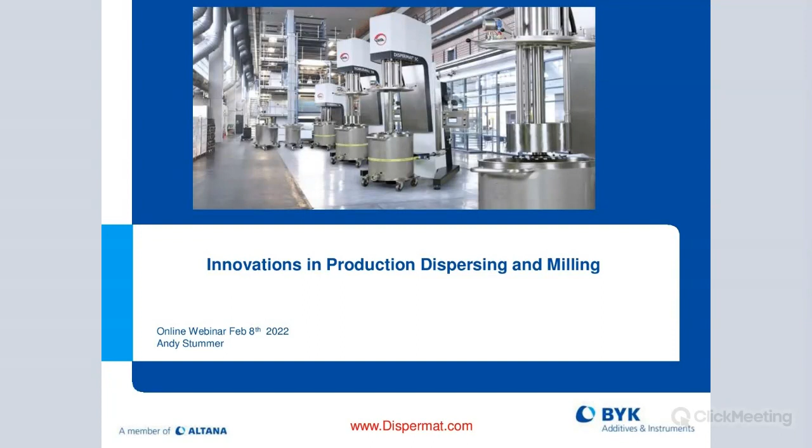Thank you, John. Welcome everybody to today's seminar on innovations in production, dispersing, and milling. We're going to discuss a little bit of theory, and then we're going to dive right into the different types of equipment, and also give you a little bit of an overview of who VMA is and the relationship with BYK.

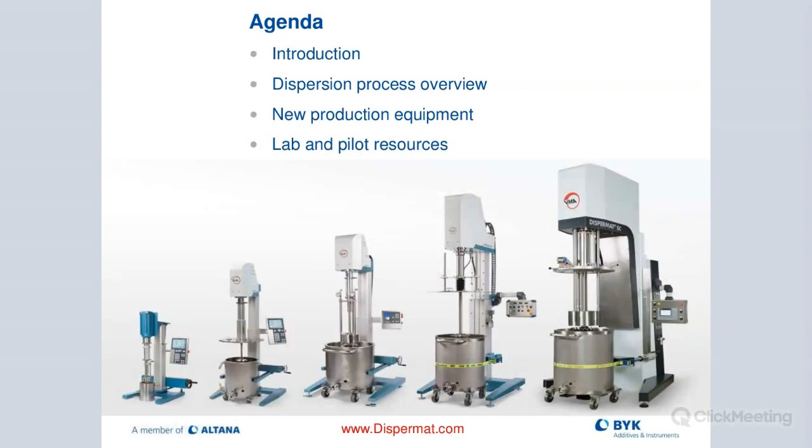So here again, you can see we cover everything really from small lab scale all the way up to pilot and to manufacturing. And you can see the equipment is very modular. So we offer dispersers as well as milling attachments on the same piece of equipment. So that makes the equipment very versatile. And that's what VMA is known for, that modularity.

So the company VMA actually was founded in 1972 by Mr. Hermann Getzmann and his wife up there, Elke. Hermann is still actually involved in the business. He's over 80 years old, and he still comes into the office twice a week just to make sure that they still follow his design philosophy. The company is now run by his two children, Christian and Martin. They're the operating people, and Mr. Getzmann is still involved somewhat on a weekly basis.

BYK has had the exclusive distribution rights for VMA products since 1988. BYK uses that type of equipment throughout their labs globally, since before the 80s actually, and they found that it would be a good idea if BYK Instruments, our company, would add that to our portfolio. And so we've been offering laboratory scale dissolvers for quite a while, and production scale since about 3 years here in North America. The company is still family owned.

They have about 100 employees worldwide, and about 12 people actually work in the design department, developing new instruments and designing different types of dissolvers, bead mills, basket mills for the lab or pilot and production. About 40% of everything that VMA makes is custom, so the company is very versatile to customers' needs.

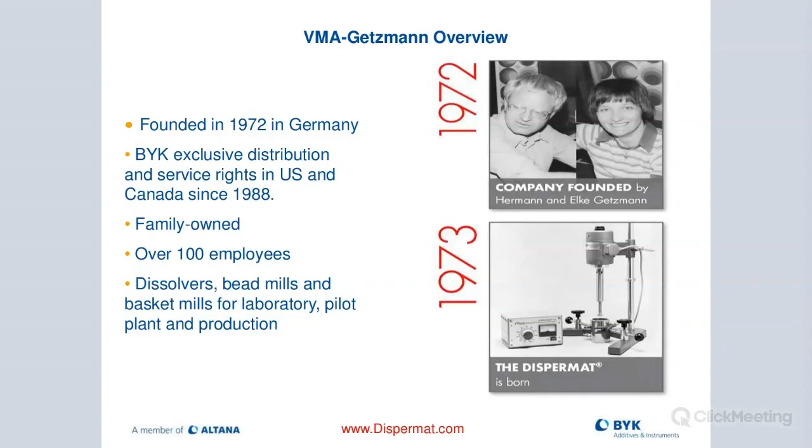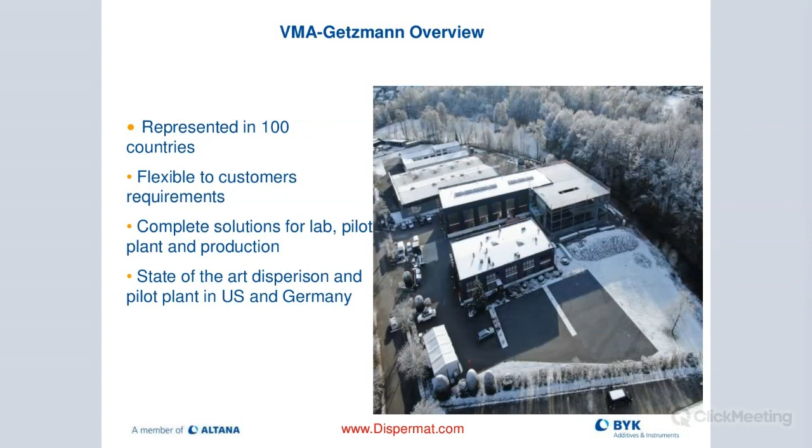So here is a slide showing you the facility in Germany. They're about 30 miles east of Cologne, which is in the middle of Germany. That building in the middle right here, that part was added on right before COVID started. And so we added more design capability as well as manufacturing capability for the Dispermats.

So just a quick overview on the dispersion process. So basically, we are trying to de-agglomerate these larger clusters of particles. So these pigment particles that are clumped together with these invisible forces called Van der Waals forces. They're called agglomerates. These are these larger building blocks that you can see here on that slide.

And the whole point of the dispersion process is to really break up these binding forces. They're also called Van der Waals forces, to break these up and turn these larger agglomerates into smaller particle sizes, clusters called aggregates.

And we achieve this process with the dispersing blade. And then to get down to the primary particle size, we really need to use some type of media milling attachment, either a basket mill or a horizontal media mill, to really get us down to the primary particle size.

So the whole idea is to break up these particles, as well as wetting of our solid particles, and then at the end, obviously, the stabilization of these particles in the suspension in the mill base. And for that, we can use some type of additives that BYK USA offers. Probably you're pretty familiar with what they have in their portfolio.

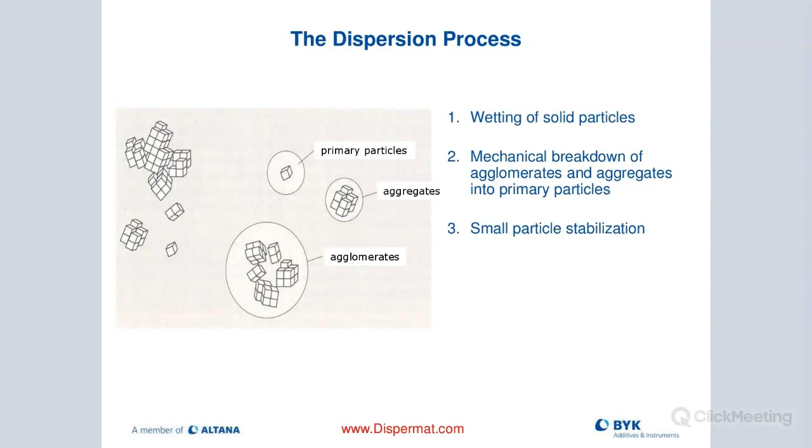So I really like this slide a lot because it shows you the steps. So in the beginning, we use the Cowles blade for wetting and breaking up these larger clusters, these agglomerates, and turn them into aggregates. And when we reach the desired particle size, roughly between 10 to 20 microns, if we want to go smaller,

we then need to move over to the fine dispersing or milling process, where we actually grind these pigments to smaller particle size. And in some instances, we can go sub-micron range or even down to very low nano range, like sub 100 nanometers is possible as well. And then at the end, again, we need to stabilize these particles and keep them in the suspended state by using various types of additives that are available.

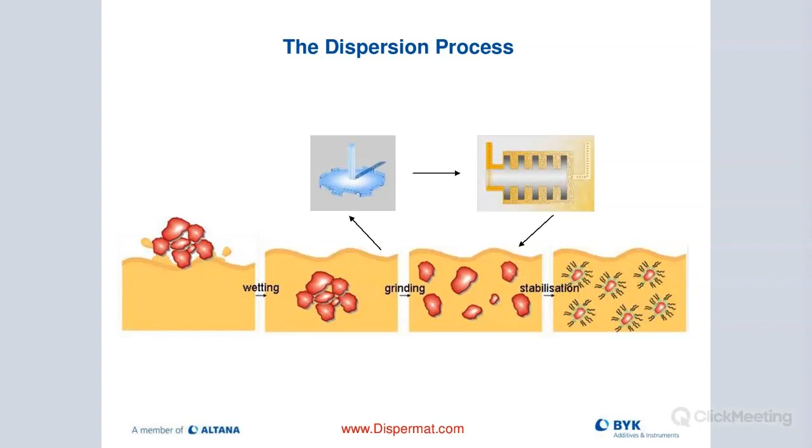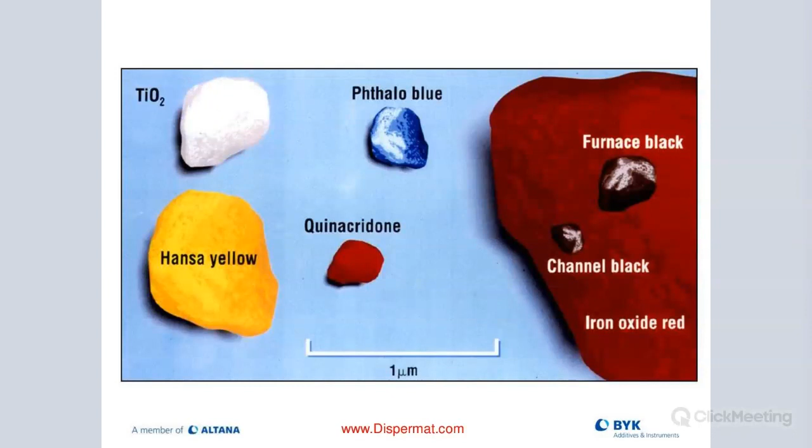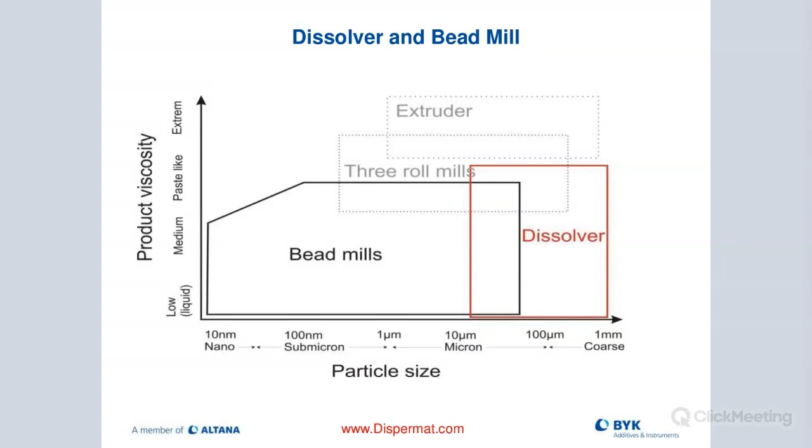And at that point, if we want to go smaller, then we really need to use the bead mills that really get us down to the very small particle sizes, down to all the way sub 100 nanometers is easily possible with the right setup. So the process is basically your pre-dispersion process, where the tip speed is very critical to be between 18 to 25 meters per second. For that, we use the dissolver. And for production, we have the model called Dispermat SC, which we will cover in a moment.

And then for fine dispersing or milling or grinding, some people call it, we need a tip speed of 10 to 16 meters per second. So it's a little bit slower than a pre-dispersion process. And there we have some vertical bead mills, which is called an APS for smaller volumes. Then we have basket mill options, our TML, that work really well with the large Dispermat SC with the quick change system, or the Torusmill SK, which is a standalone basket mill also for production. We'll cover that as well.

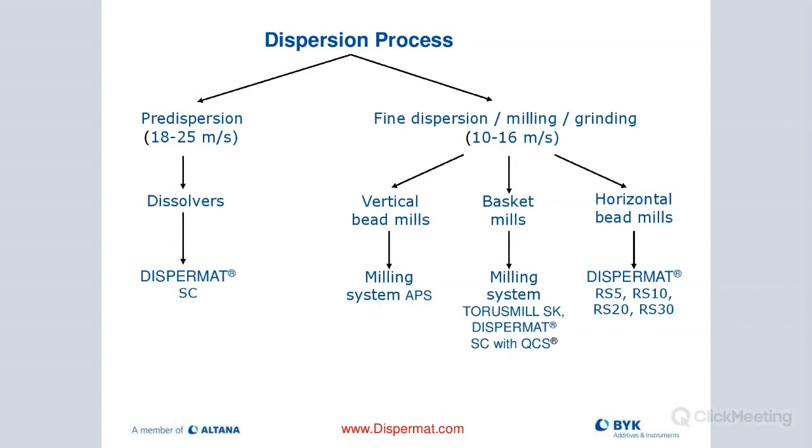And then we have horizontal bead mills, Dispermat RS line, different sizes all the way from an RS5 to an RS30. It's just that they have different milling chamber volumes, and we look at those as well. So we have a whole range of different milling solutions for the fine grinding part of the dispersion process.

So here just some different applications, or we call them end-use markets, where these Dispermats are used. So you can see it's pretty self-explanatory. Coatings, inks, dyes, all the way to adhesives. We do some battery slurry development. That's pretty new for us. We also dabble in the food market, agrochemicals, 3D print media.

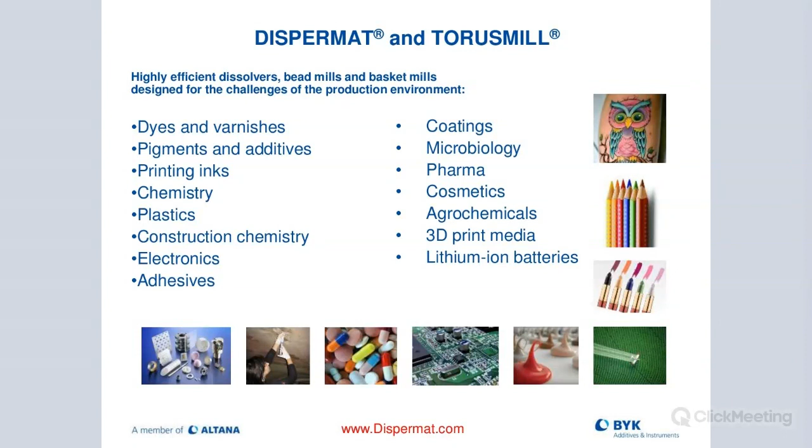Cosmetics is also very big for us, and all sorts of different coatings that are on the market, marine, architectural, automotive. So there's a wide range of different applications where our equipment is used to manufacture these products.

So that makes that modularity really handy, because you just buy one piece of equipment and you can do your pre-dispersion, and then when you're ready to do milling, you just swap out the Cowles blade for a basket mill, and then you can do your fine grinding all on the same machine.

So that is the Dispermat SC. The output is 15 to 55 kilowatts of power, depending on the motor size, based on the volume. We can go all the way from 35 liters up to 2,000 liters. We have done 2,500 liters for some custom applications, so that's also a possibility.

There are different control boards that are available, and we'll show you that in a minute here. And the SC can be fitted with the QCS system. That's a patented system called the quick change system. It's basically a bayonet style flange that's up here, and that allows you to seamlessly go from a dissolver and change over to a basket mill.

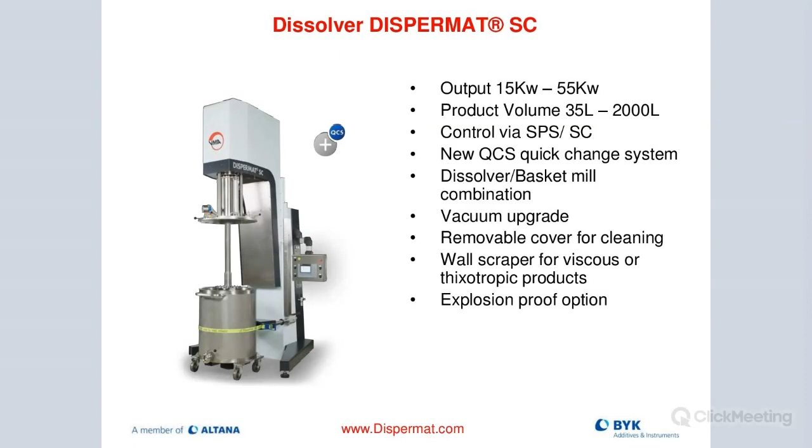So here is another slide detailing the quick change system. You can see here on the machine, we have the dissolver blade. And when I'm completed with my pre-dispersion, I don't have to remove the container. It can stay under the machine, and I'm just swapping out the blade with the basket mill. So it's a really nice system. The machine can also, as I mentioned earlier, be outfitted with the rotor stator system as another option.

We also have ceramic components for our basket mill. There is a need for certain applications where color stability is very critical. During the milling process, if this is all stainless steel on the inside, the beads will wear down the metal of the basket mill, and these tiny metal particles end up in the slurry of your coating. By using a ceramic-lined basket mill and the ceramic rotor, we're able to minimize that wear and not have any discoloration of our final product.

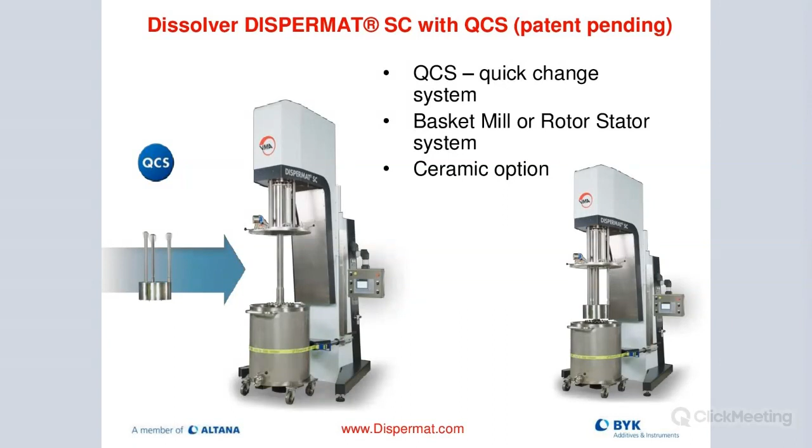So there is a need for it, especially if you're producing a lot of light or white colors. Then you really want to look at the zirconium option. We also offer silicon carbide, which is a dark ceramic for improved wear, because one of the biggest issues with milling is always the wear on the equipment, and the milling disc inside of the basket mill is probably the biggest wear part. By purchasing a ceramic milling disc, that really improves the wear tremendously. So these are some of the options that we offer.

So here is an example of a vacuum system. That's just the cover on the machine. So it's lowered, and therefore the whole footprint of the machine is smaller. And by doing vacuum, we have an improved wetting and dispersing effect.

By taking out the air, we have more energy input, because you imagine these tiny air bubbles, they act like air mattresses, and they're basically buffering the blow of the beads. And by removing the air, I'm able to put more energy into my mill base. So that means I have faster milling time. Obviously, I'm getting rid of all my foam.

As I mentioned earlier, we have an improved product transfer from one container to another, improved homogenization due to the time improvement. Obviously, cost savings are associated with going with vacuum. We do not sell vacuum pumps. We have some recommendations as to who you could use.

The vacuum pressure is really excellent, almost what we have in space. So depending on the vacuum pump, you can adjust the vacuum pressure to whatever suits your application best. In some areas, customers require nitrogen in a dry process. So we have the ability to add a nitrogen purging valve, allowing you to do this whole thing in a dry process as well. So that's just an add-on that we can put onto the lid, so we have the additional nitrogen purging option.

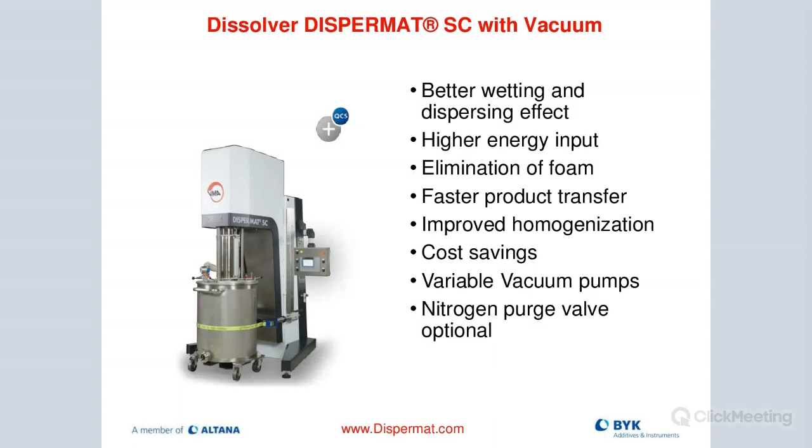So that's a great example of the vacuum cover on a smaller production scale Dispermat. So here you can see you have a viewing glass on top. There is a light on the inside that you can control from the control board right here. I have the ability to add more product right here. And then on that side, you can see the pressure valves to release the pressure from the vacuum or nitrogen.

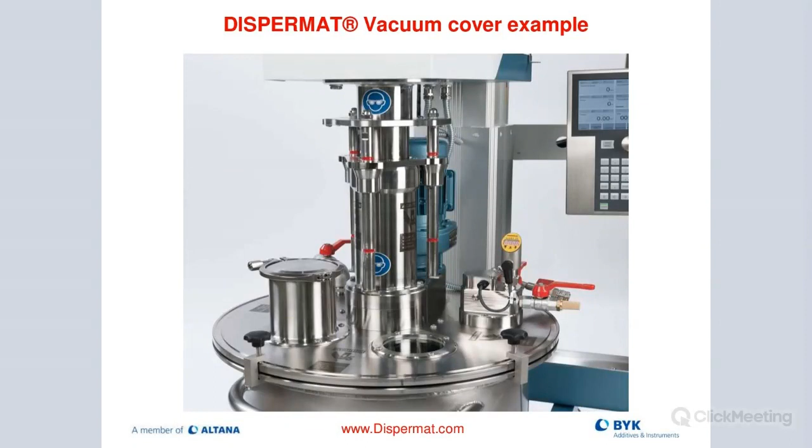So let's say I have a temperature threshold where I don't want the mill base to exceed a certain temperature. I then just program a cutoff value, and that tells my machine either to shut off or to run with a different speed or different energy input. So there's a lot of different ways I can set up my production runs. Instead of just running with a certain speed, I can also set up the machine to run with a certain amount of energy.

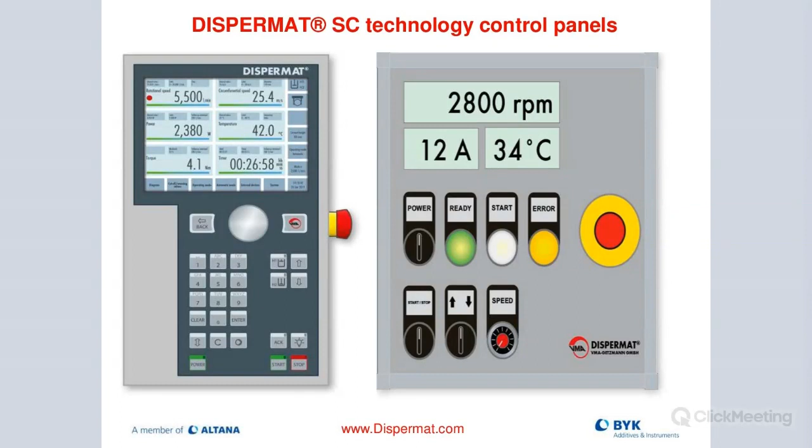And I can set up the experiment in the lab that way, as well as my production environment or my production blueprint as well. All the data can be stored in a database with the SC technology. I can give the individual products a product name and store it by product name or product number. And then at a later point, when I want to run the same material again, I just recall it. And it allows me then just to replicate the process exactly the same way every single time for repeatability and reproducibility of my production trials or runs.

There is another control panel option that we have with Siemens. So basically, customers sometimes want to integrate a scale, for example, or they have their own QC process, so they are able to program the machine themselves by using this particular control board and do everything customary. Unfortunately, right now, the lead times are really long for this programmable control board. It's almost 1 year right now, what I found out last week, the lead time, about a year for that kind of integration.

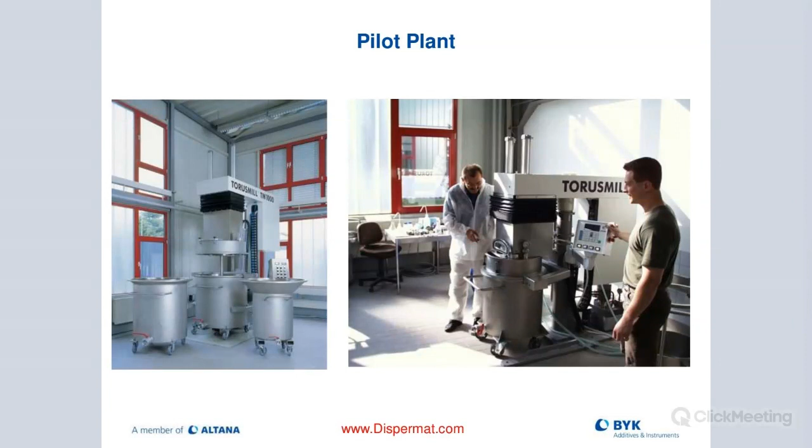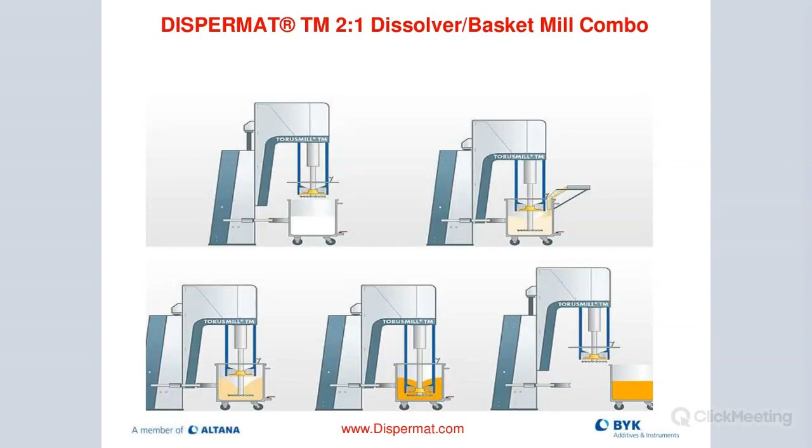We also have a really unique solution, which is called the Dispermat TM. It's a 2-in-1 dissolver basket mill combo. The SC that I showed you before basically had the ability to swap out the baskets and then replace the milling baskets as you need them for different color families. On the TM, the milling basket is integrated with the dissolver, so you don't have to swap it out at all. This is great if you're running one color on the machine and you're not really changing the color and dedicating the basket to one color.

So basically, you do your pre-grind, your pre-dispersing with the Cowles blade, and when you're ready to do milling, all you have to do is push a button on the control panel, and then the basket mill will come down, will get lowered into the mill base container, and then you're ready to do your milling. There is no need to move a container around to swap out baskets, so everything is integrated. It's a true 2-in-1 dissolver basket mill combination. Obviously, there's a lot of advantages to that. Also, footprint is reduced. Again, I only need one machine for all my dispersing and milling needs.

With this particular setup, I can go up to 1,600 liters of product. I have also, again, the different control options, as I showed you earlier. We also offer an explosion-proof model, as well as ceramic options for really color-sensitive applications where you want the ceramic to protect the color from discoloring. And then again, we have also a vacuum option as well for the TM.

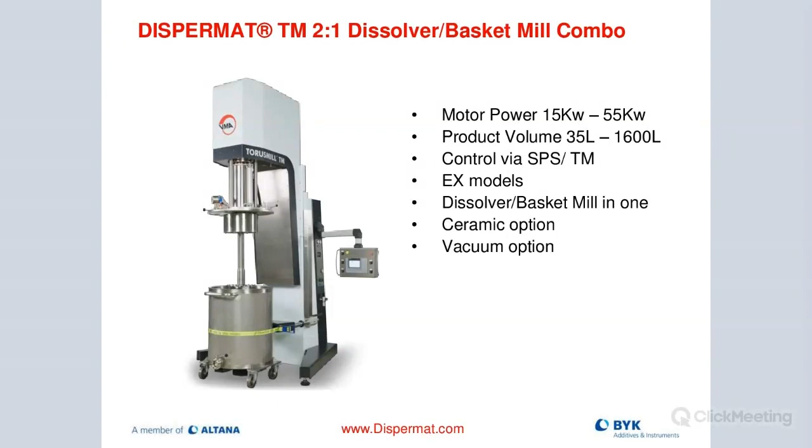So here you can see how the basket will come up and down. So it's an excellent solution for customers that run one color and want to dedicate a machine just to that one color family. We also offer different container sizes. They are double walled for cooling, and then we're also able to cool our basket directly, and I'll show you that in a minute, for proper temperature control and maintenance.

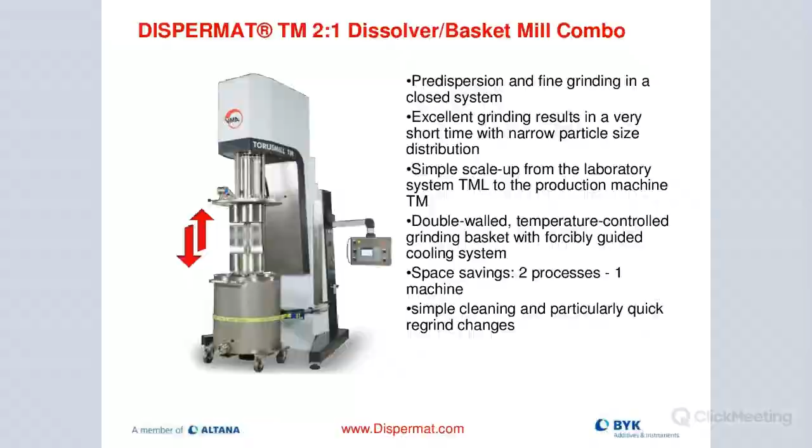So here is a slide of a customer where we installed 2 large TM1000s, production scale machines, a dispersion manufacturer in the Midwest. And you can see here the basket right up here. Behind this gentleman, we have the dispersion blade that's not installed yet, that will go right on here. And then basically the combination system, basket as well as dispersing blade, all in one. They run these machines, I checked with them a week ago, 24/7. They're super happy with the performance and the wear on the equipment. So they're real workhorses for their manufacturing operation.

We also offer this Torusmill SK for production, also in different sizes. The SK is a dedicated basket mill, so it comes as a basket mill, but again, you have the option of fitting it with the QCS package so that you could swap it out to change it over to a dissolver if you wanted to. So they're also backwards compatible.

We again offer explosion-proof models, different control options, ceramic option. You can also get a nano kit. The nano kit for the basket mill allows you to really grind down the particles to super small particle size. With the basket mill and the nano kit, you're able to go down roughly to 400 nanometers of particle size. And again, because I can remove the baskets very easily, I can do very quick color changes with the SK or with the SC that I showed you earlier.

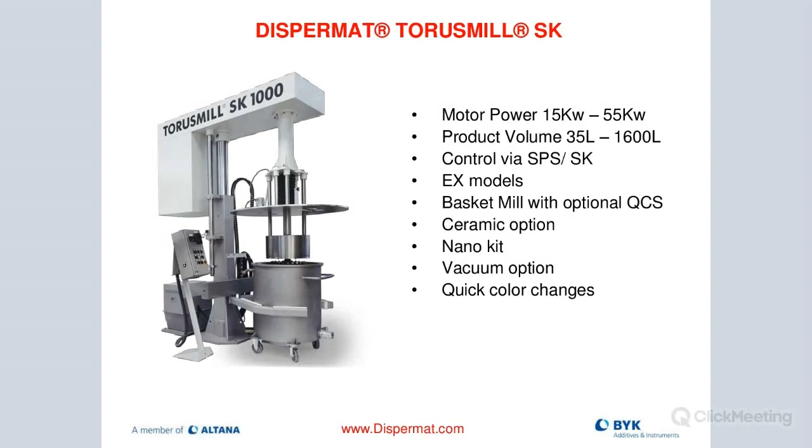Here is the QCS stand. So really nice. That's just one option. Other customers remove the basket differently, but this is an option where you have a stand and you just put the stand underneath the machine, lower the shaft, and then basically once it sits on the stand, you just open up the quick change system, that flange, and then just remove the dissolver or the basket mill, and then just replace it with another basket mill or a different dissolver disc.

So I would say that a change from one basket to another basket or to a dissolver blade can be done in under 3 minutes. So you can be sure that you're always using the equipment for what it's designed to do, making product for you and not sitting there idle, wasting hours cleaning it. So there is a lot of upside to having that quick change system integrated with our Dispermats.

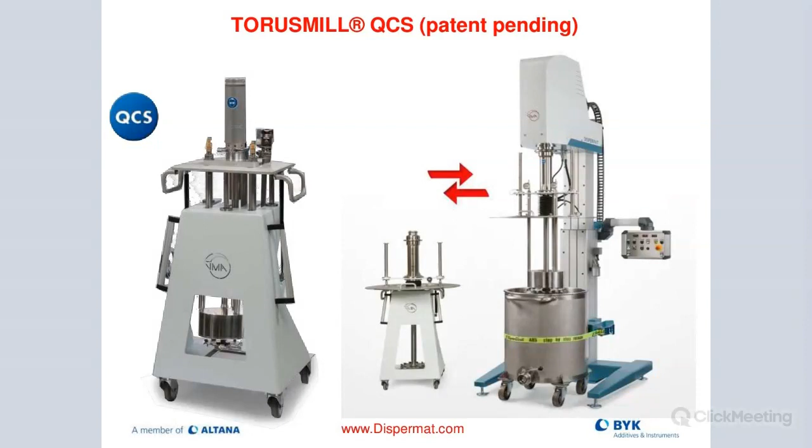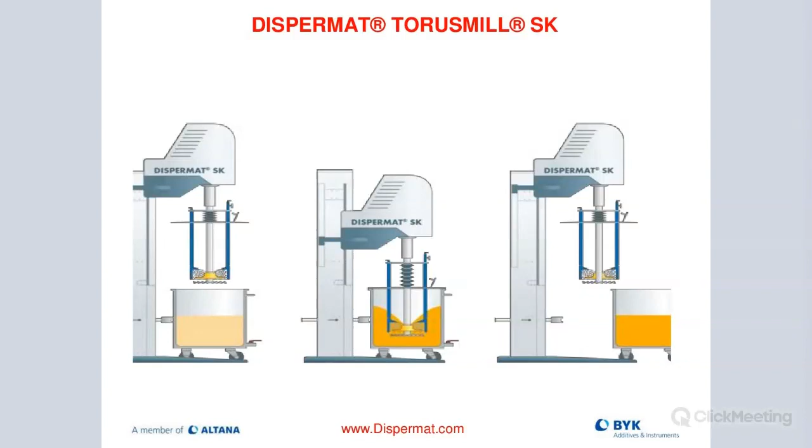Just a couple pictures here with the SK mill. So you can see on the mill on the bottom, there is a Cowles blade that actually allows us to pump the product out of the milling basket and push it back around to the top in the container where it then gets sucked back into the mill. So we have a very good flow and rotation of the mill base in and throughout the basket mill to ensure proper and efficient milling.

That's a great slide showing you that. So basically that's the design of the basket mill. Here is the basket. Inside the basket on top, we have a pumping wheel. Below the pumping wheel, we have our milling disc. And then on the bottom, we have a screen. And right outside of the screen, we have that Cowles blade.

So that Cowles blade actually draws the mill base through the screen, pushes it back around to the top, and then that pumping wheel inside of the mill on top will then suck the mill base back into the mill. So I have very efficient circulation of my mill base in and throughout the mill. And the small dots right there are your media that are used to grind down the pigment.

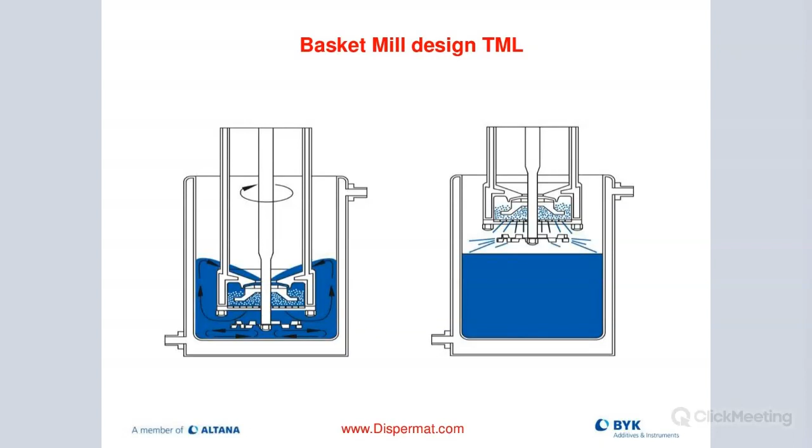So here is an example of a large basket mill. So right here, this is where you're adding the media. And you have a rod here for cooling, so that would be coolant or water in. These basket mills are all double walled for optimum cooling. So we're actually not only cooling the side of the basket mill, we're also cooling the top. This is where most of your energy gets created, inside of the basket. So we really want to properly cool that part.

And then we have coolant or water return. And on the back side here, we have another rod. That's actually how we measure the temperature inside of the basket mill. So we literally get the accurate reading of our current temperature of the slurry inside of the basket mill. That's where most of our energy is dispersed, and that's where we should be able to monitor the temperature for an accurate reading.

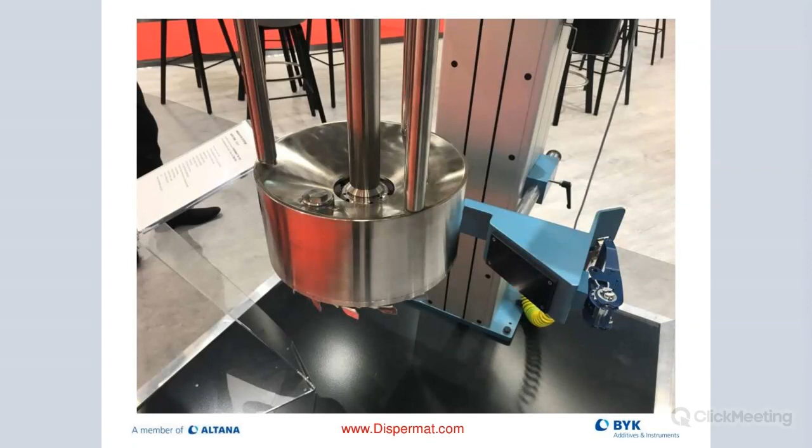We also have a vertical bead mill design. This is more for lab scale and pilot scale, so small scale manufacturing. So it's not for very large volumes. We can go up to 30 liters with the custom design. This is used mainly for really expensive pastes or coatings where you use gold or platinum, where the material is super expensive and the volumes are not too large.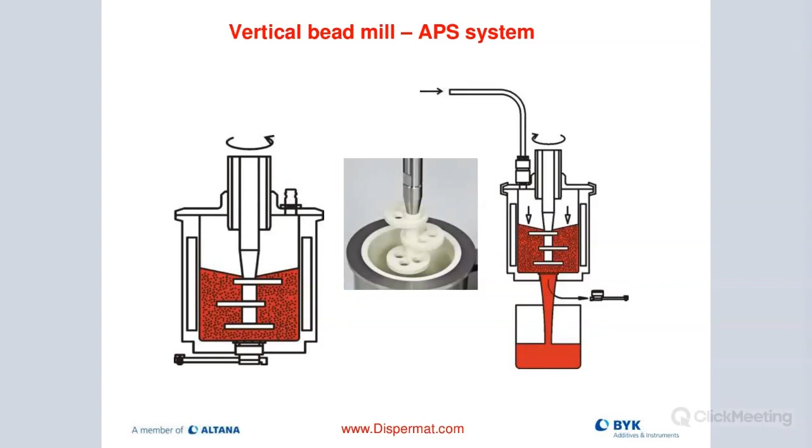So we have a really excellent applications lab in Germany where we can do other trials. We have vacuum systems, we have rotor-stators, all different types of milling systems. So we can send material there. Or we also have a nice lab up in Wallingford in conjunction with our sister company, BYK Additives. We're able to do trials. I also have a horizontal mill back here that's not on the picture, and I have also additional vertical bead mills available as well. Here you can see all the different attachments. So we'll be able to really do trials for our customers, bring you in and show you proof of concept, and basically show you how all these different attachments work with our system.

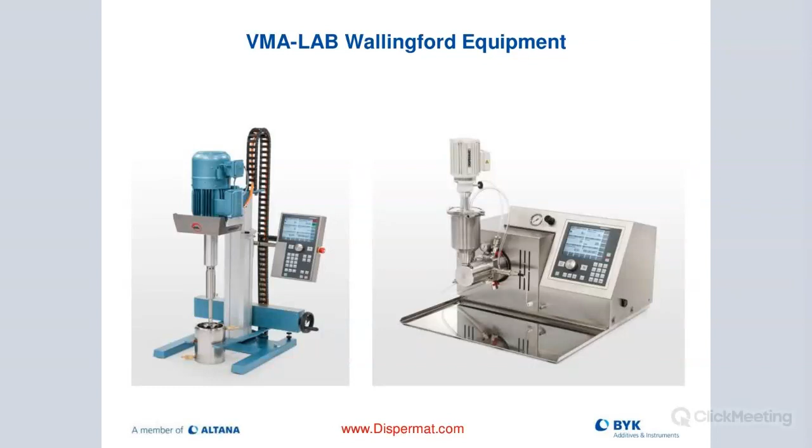An example of the two new pieces of equipment that we have in the lab in Wallingford. So that's the new AE6 with the new C control, and we also have a new SL12 horizontal bead mill that is also in our lab in Wallingford for doing trials on a horizontal mill. So the Wallingford site is really a first-class lab where we have all the capabilities to really show you the performance of our equipment with the different milling tools. We also have the ability to upscale to larger equipment. Our equipment really upscales at a ratio from 1 to 1. So that's really good, especially for somebody who is looking to really replicate what they're doing in the laboratory.

We're also able to utilize the resources that they have up there. So we have a chemist that will work with us while we're doing the trial and give us advice on formulation changes or other options during the trial that are really helpful coming from the chemistry side. It also can be a showroom for our customers to bring them in and show them just the equipment without doing a trial, or we could also utilize it as a seminar location. So if you have a larger group, we can discuss having your entire team up there for a day or two to do a whole seminar and then training on the equipment as well as hands-on on the actual dispersers and milling gear.